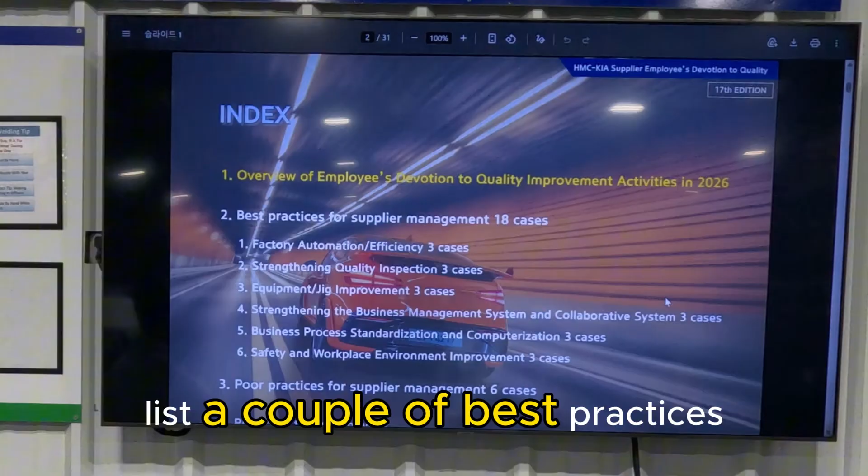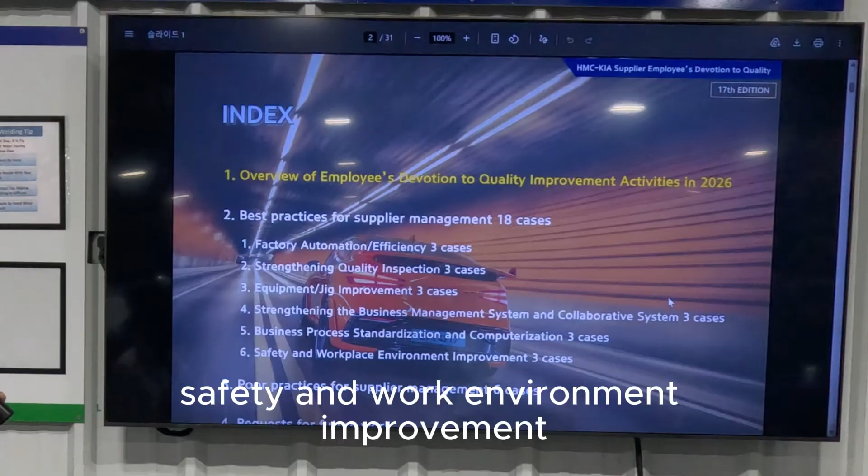This is the index. First is the overview of devotion to quality improvement activities in 2026, and the presentation lists a couple of best practices from different suppliers based on factory automation to improve efficiency, strengthening quality inspection, equipment and jig improvement examples, strengthening of business management system and collaborative system, business process standardization and computerization, safety and work environment improvement, and some examples of poor practices in management in the shop floor, and finally a request for future work.

This is the overview of the employees' devotion to quality improvement activities in 2026. They will review the 2025 and 2026 plan and the 2025 implementation results.

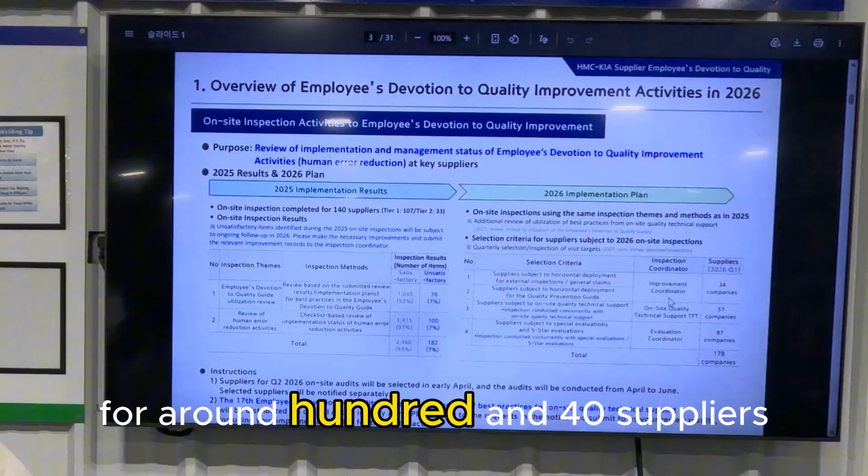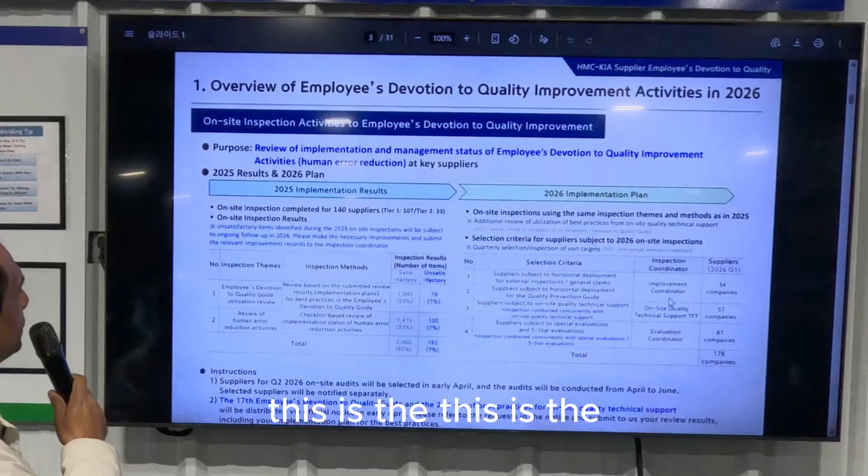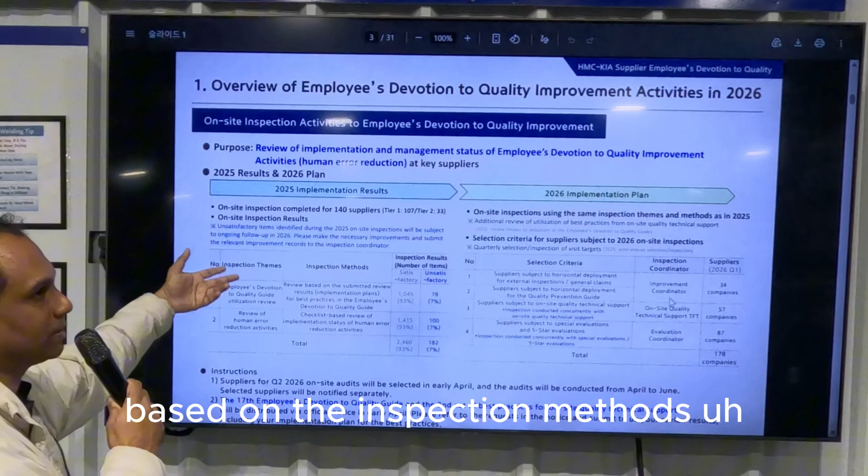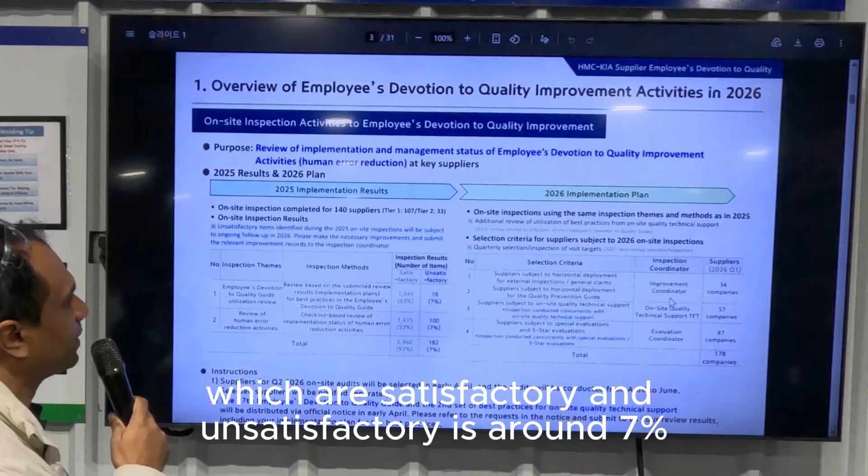The on-site inspection completed for around 140 suppliers, Tier 1, 107, and Tier 2, 33. Based on the inspection results, total inspection results are around 93% satisfactory and 7% unsatisfactory, based on the inspection methods, automation, and everything on the shop floor. Then a review of human error reduction activities, which is around 93% satisfactory overall and 7% unsatisfactory.

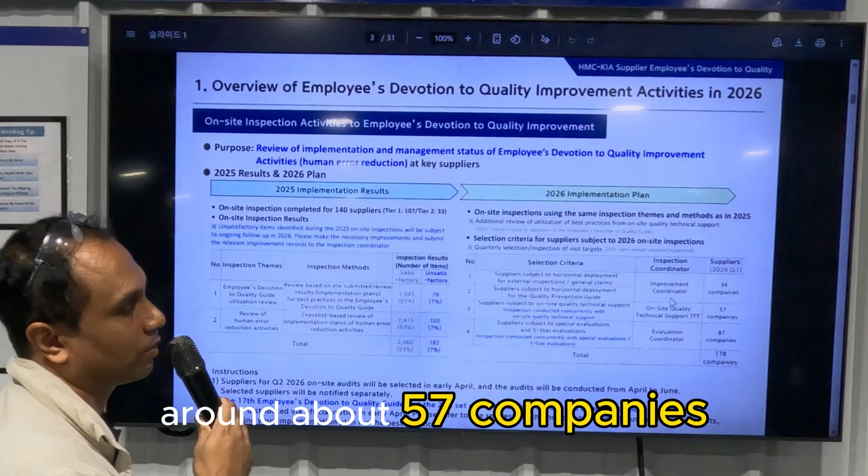In 2026, they're going to do the same thing again, maybe with different quarterly visits. They will select around 34 companies for improvement coordination, on-site quality technical support for around 57 companies, and other evaluation for around 87 companies.

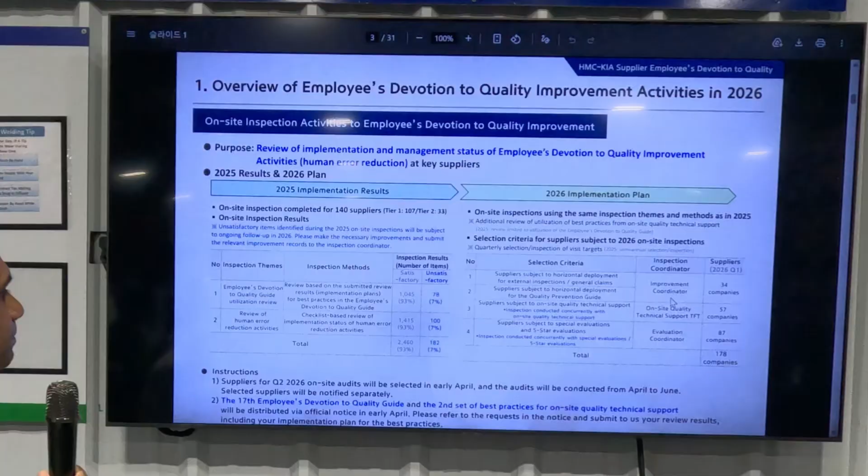They will choose and let us know when they will come to do an audit. It also involves 5-star evaluations too. HMA, for example, will do a 5-star audit this year, most probably in August. They will select in April and then let us know. The audits will be conducted from April to June, or maybe even further.

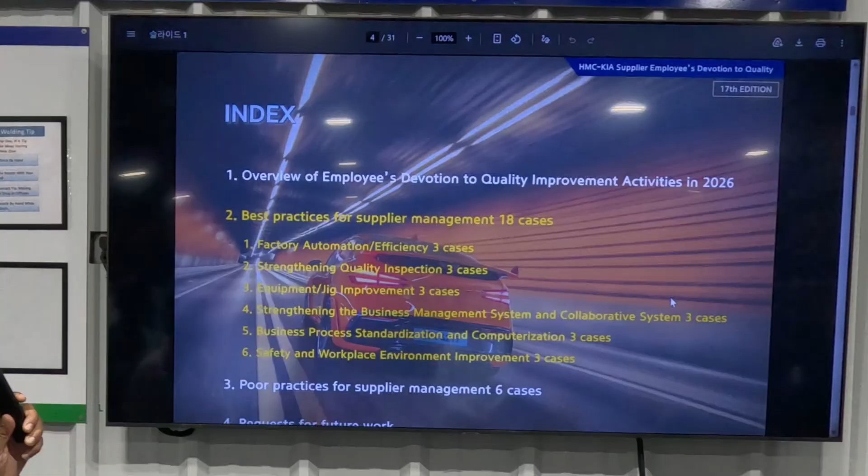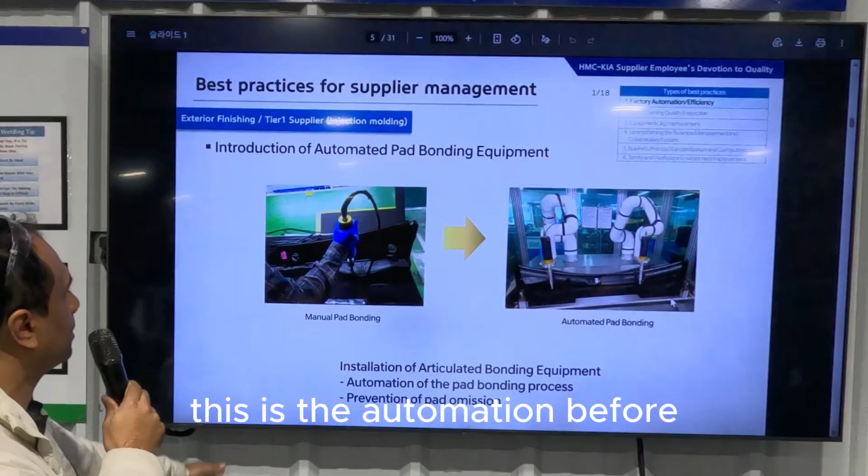These are a couple of examples of best practices for supplier management. For example, this is the automation before, in this case, of pad bonding.

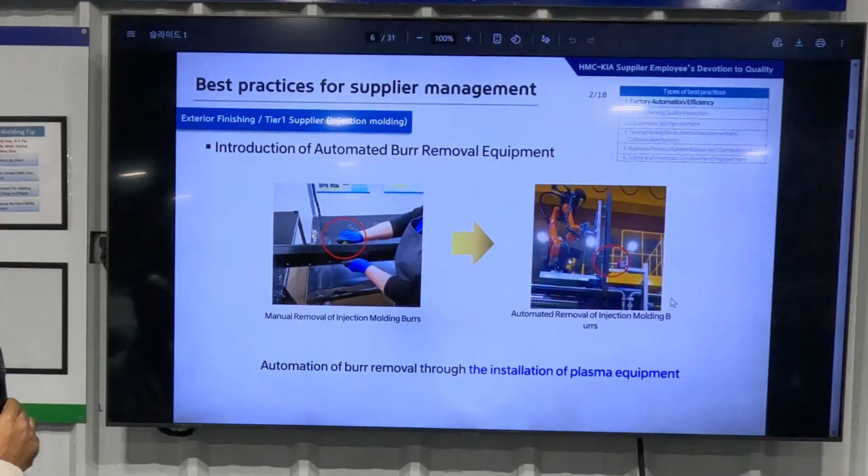This is just manual pad bonding, and the improvement is basically automated pad bonding. Similarly, for the burr removal, manual removal of injection molding burrs, and they have improved to automated removal of burrs.

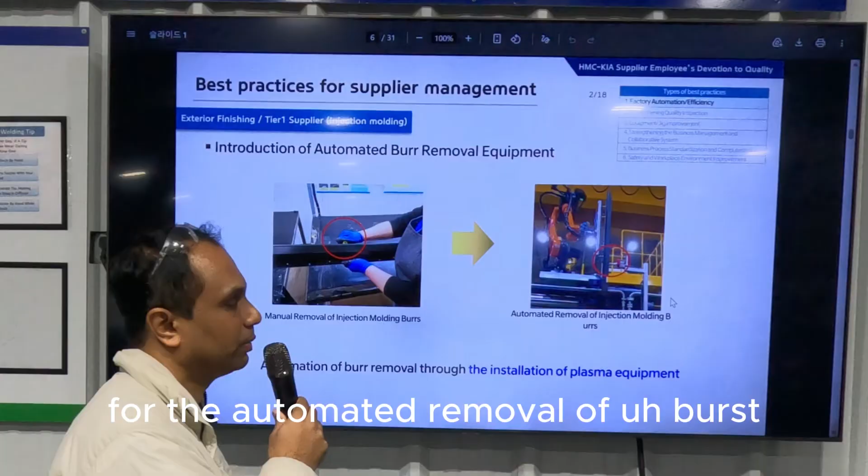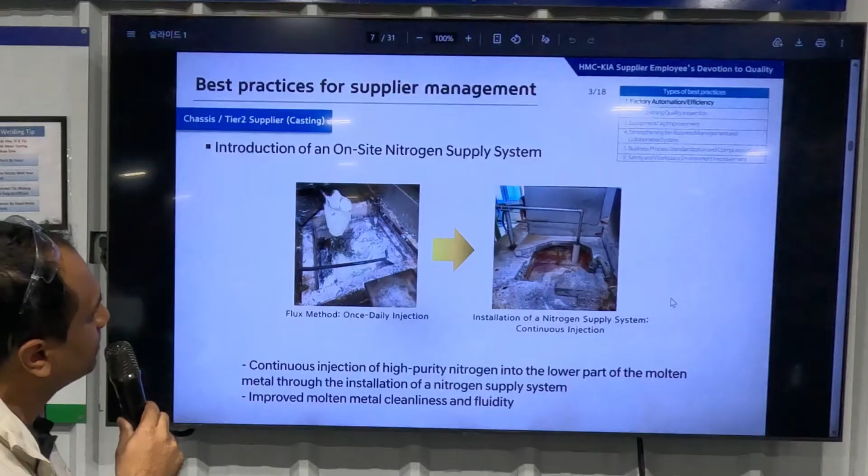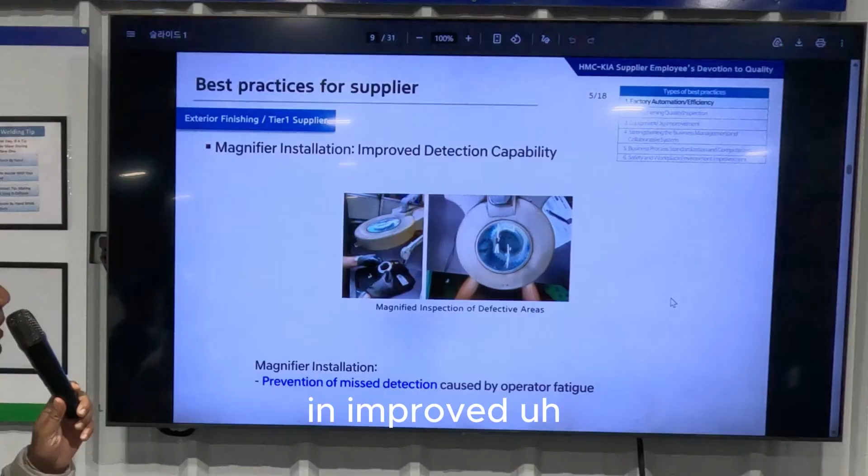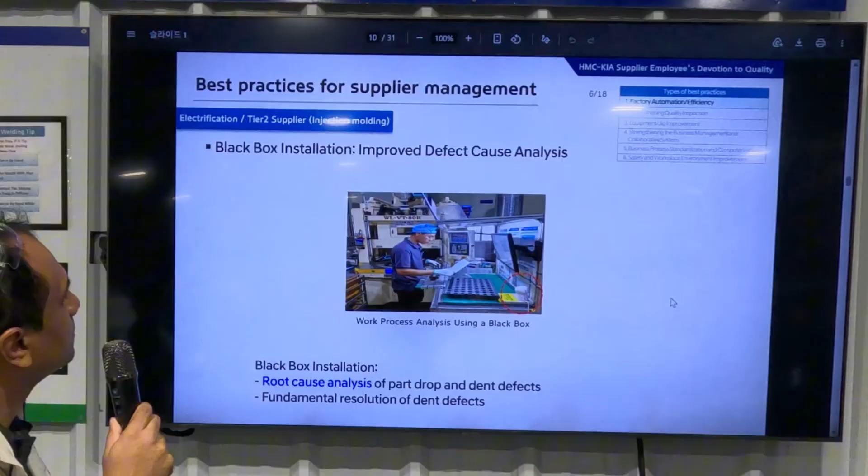This is also improved detection capability for inspection. They use magnifying glasses to find the defects in that part. Again, a different improved inspection analysis, in this case using a black box.

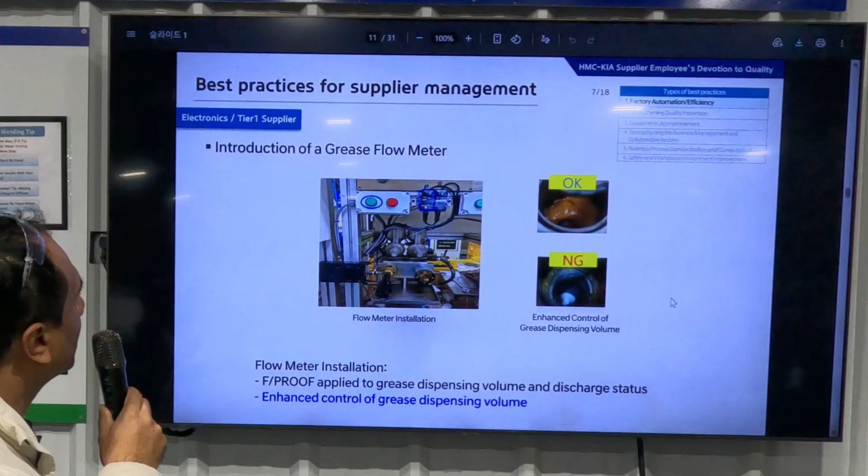Introduction of a grease flow meter to check the grease flow. It checks automatically if it's okay or NG based on the volume of flow.

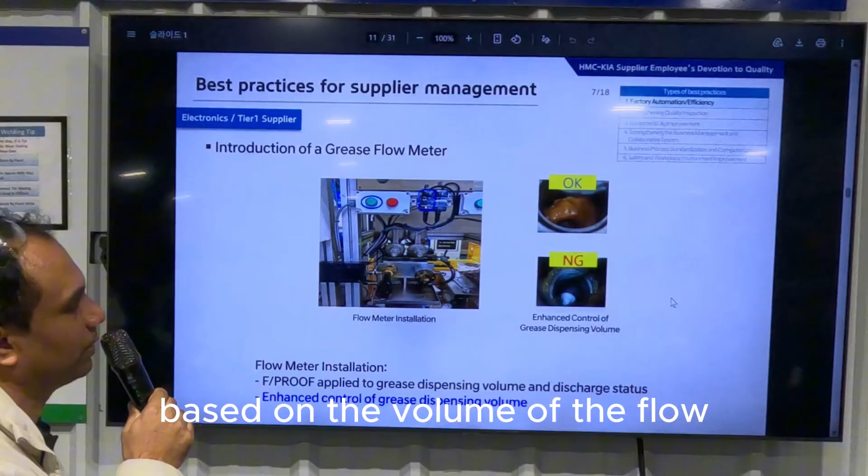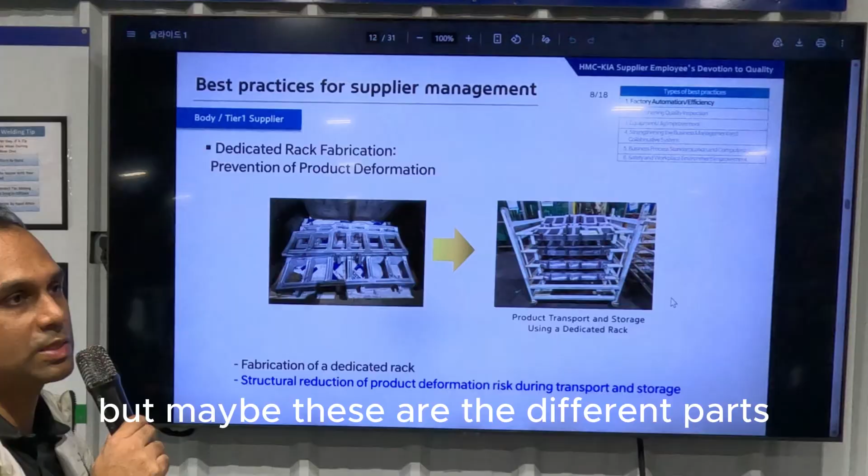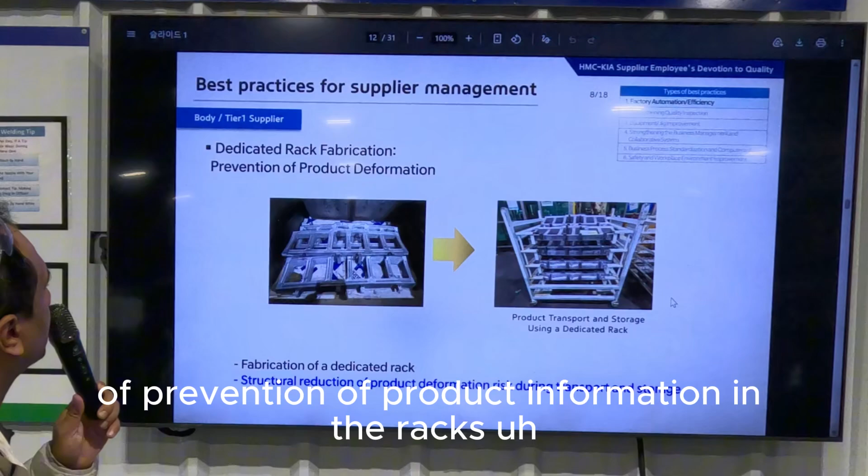We have similar processes, but maybe for different parts, and we can also implement based on the improvement ideas here. We can also improve our process and systems. You could see in this case the prevention of product deformation in the racks, how they improved the racks and storage system.

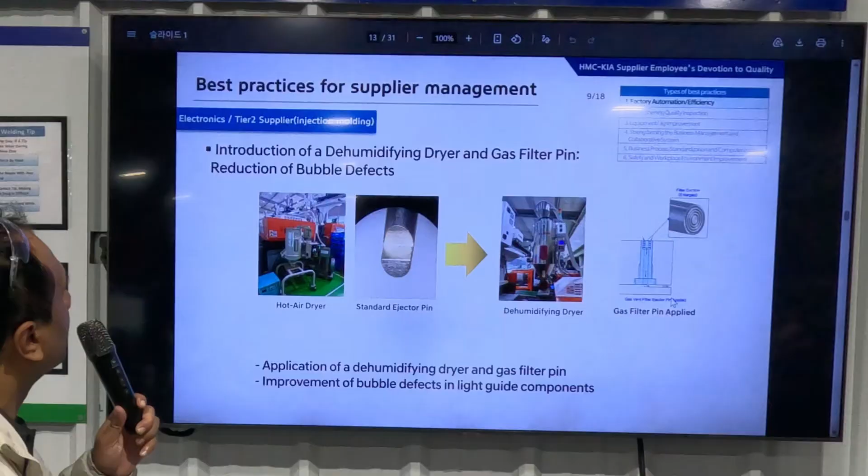Here, just the improvement, reduction of bubble defects in the dehumidifying dryer and gas filter. You can see visually from the pictures.

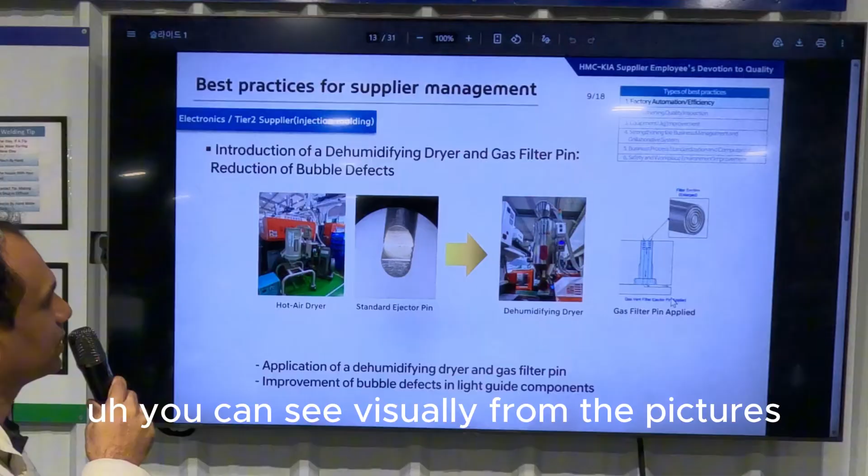This is the establishment of the on-site call system in case of production stop and part quality issues. The supplier established a call system where the monitor shows there's an issue in a line, and it blinks, and management has to go to the line and fix the issue. It's basically an on-site sharing system.

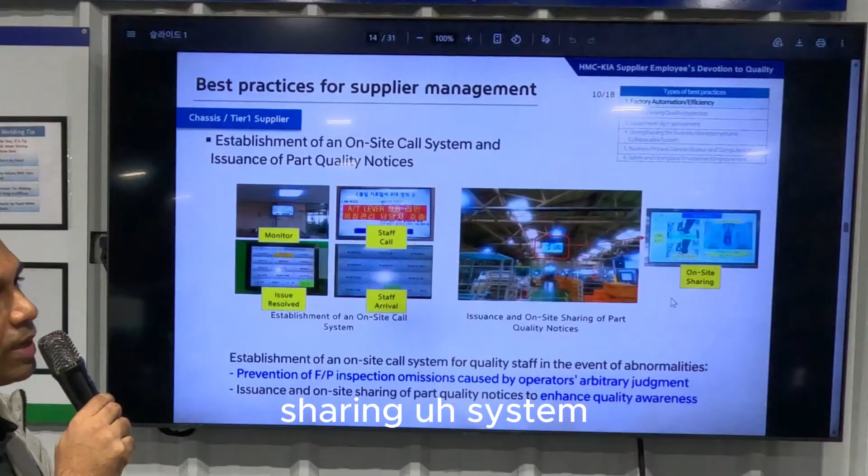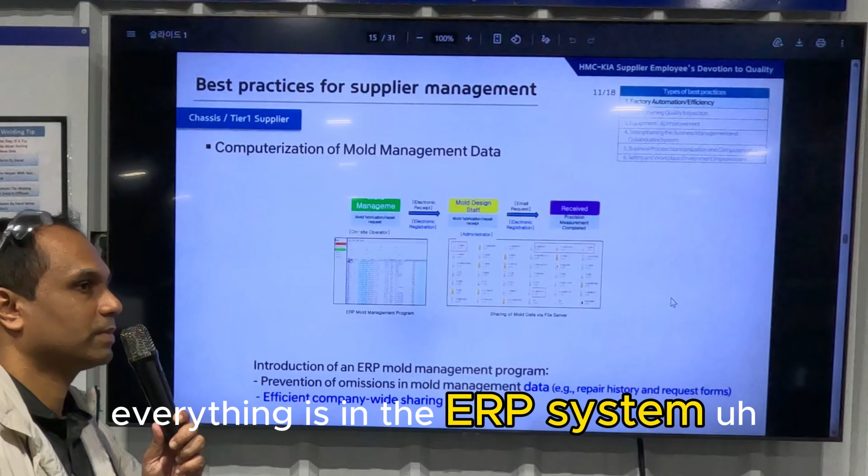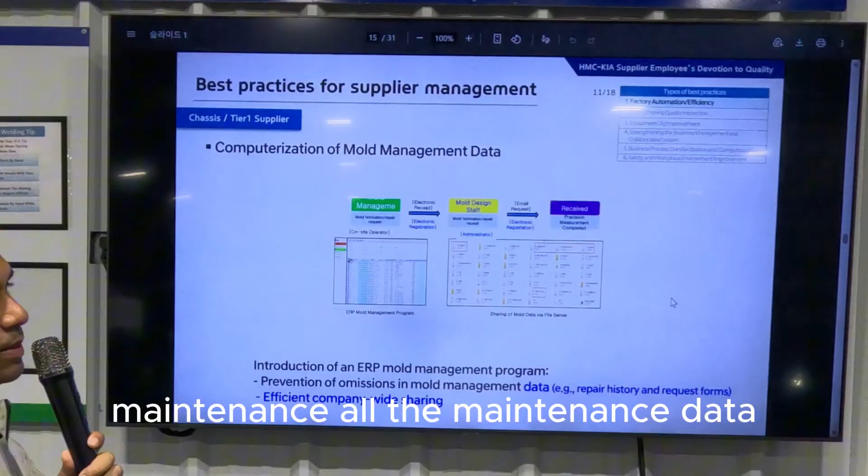This is for maintenance: the computerization of mold management data, how everything is in the ERP system for mold management. In our case, the time management systems are all computerized, and you can see when it's maintained, all the maintenance data, repair history, and other information.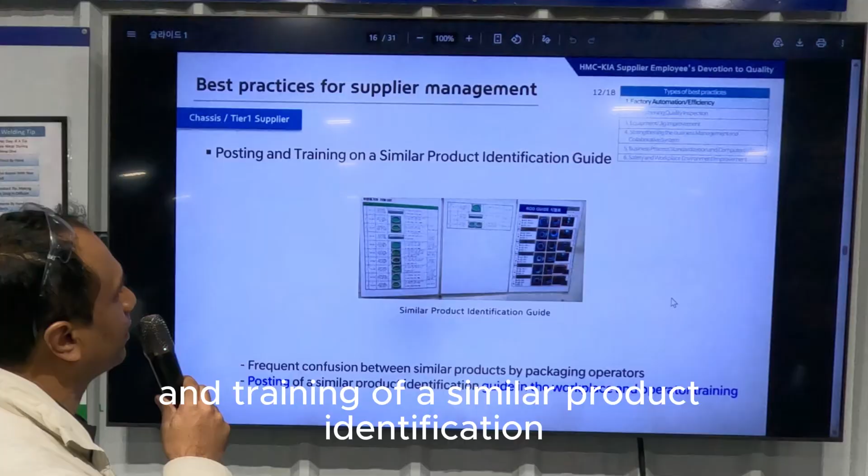This is just the posting and training of similar product identification for operators and inspectors in the workplace.

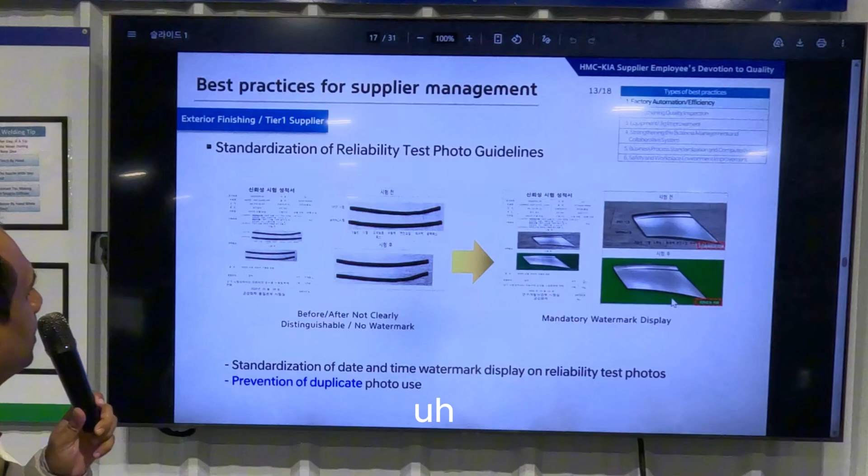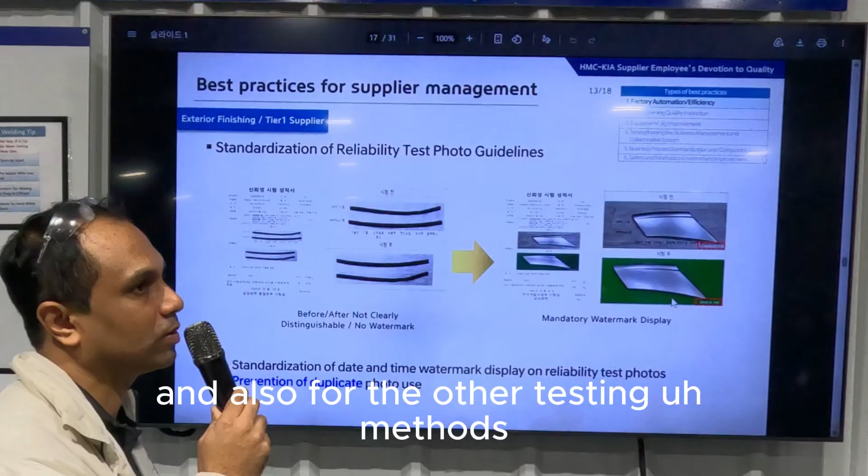This is the standardization of reliability test photos. These are the before and after pictures of the displays and how to inspect, and also for other testing methods.

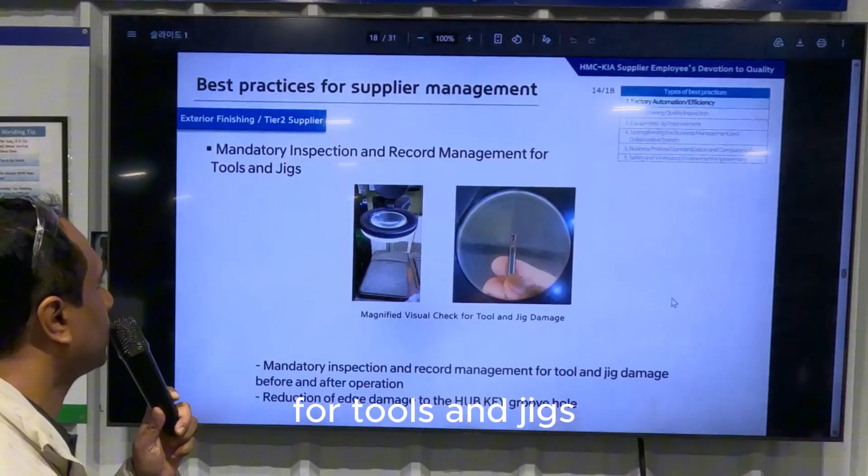This is mandatory inspection and record management for tools and jigs. This is the visual check system improvement.

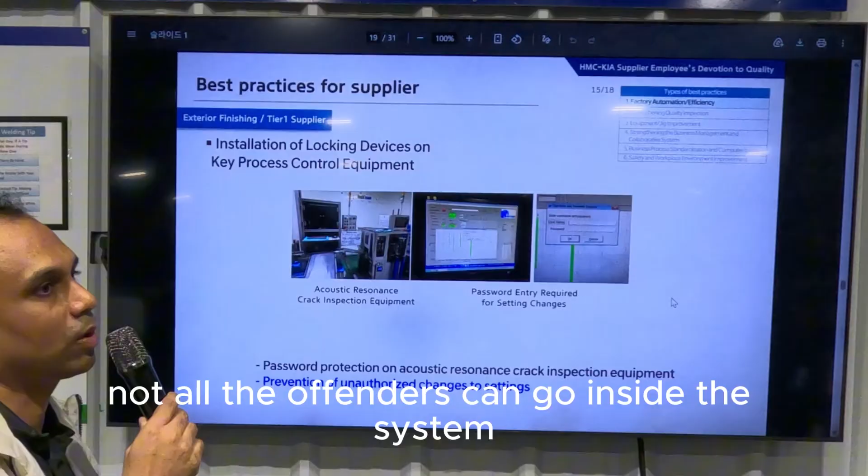This is installation of locking devices for key process control equipment. In case of maintenance and production, they have a specific username and password so that not all operators can go inside the system and change the parameters. Only approved personnel will enter the system, and we do have it.

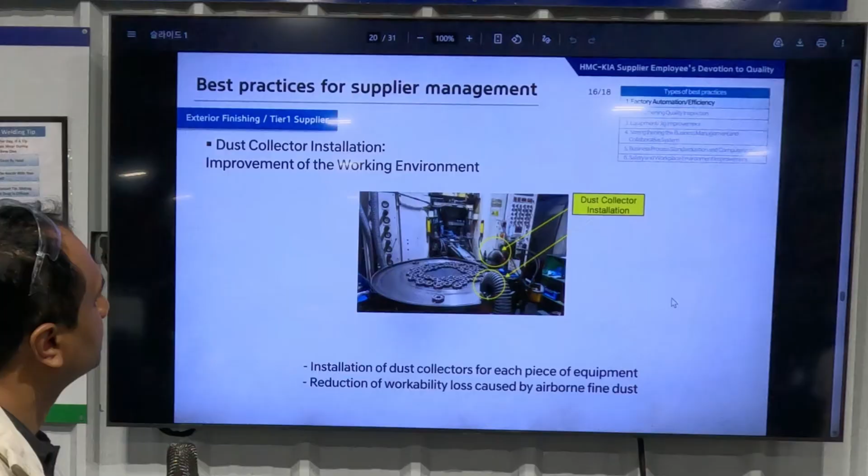This is the dust collector installation. Just the visual check, you can see it, visual check.

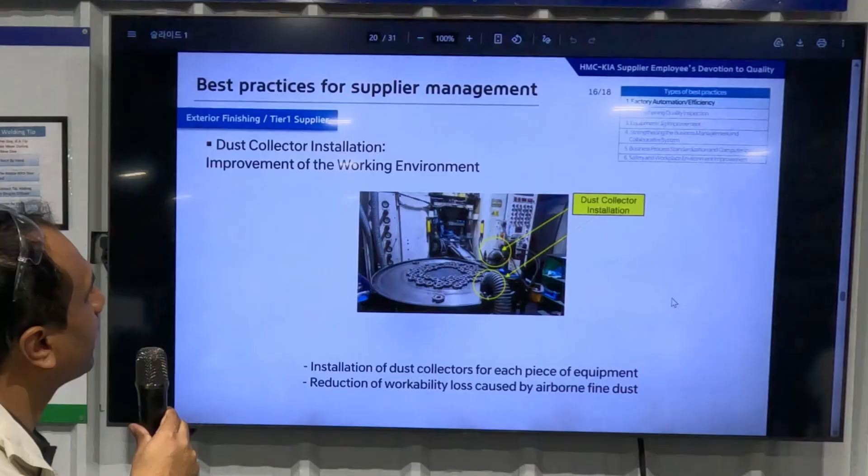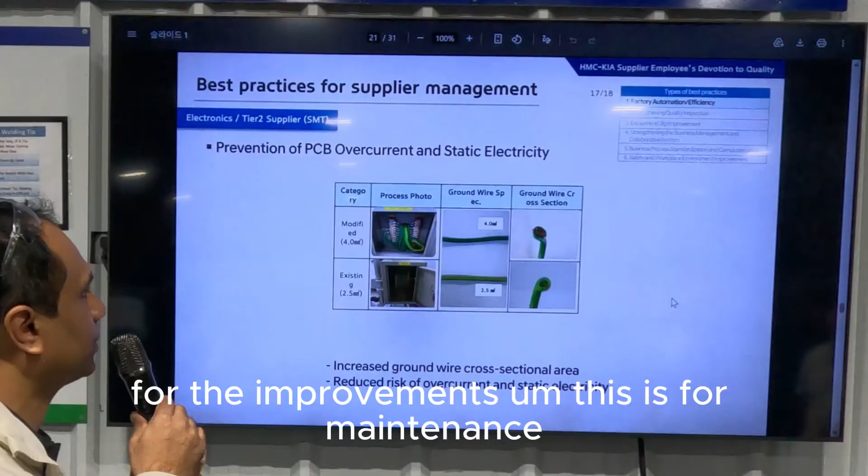This is kind of the electronic system. Increased ground wires for the cross-sectional area for the improvements. This is for maintenance.

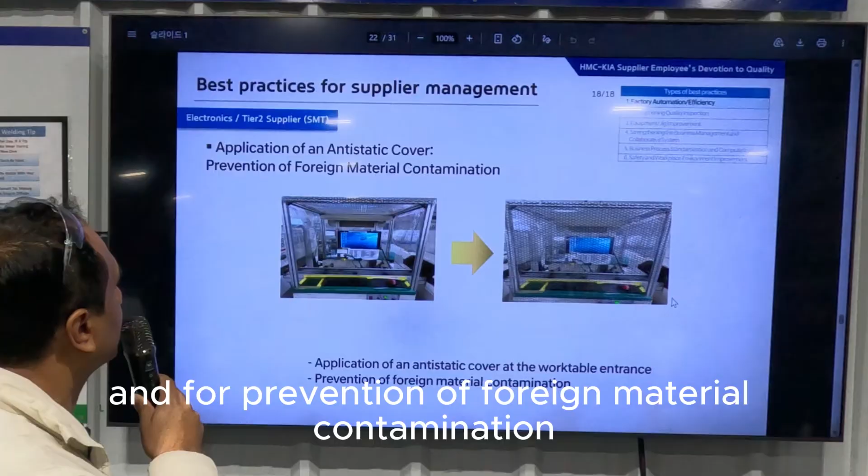Application of anti-static cover and for prevention of foreign material contamination, kind of put a barrier.

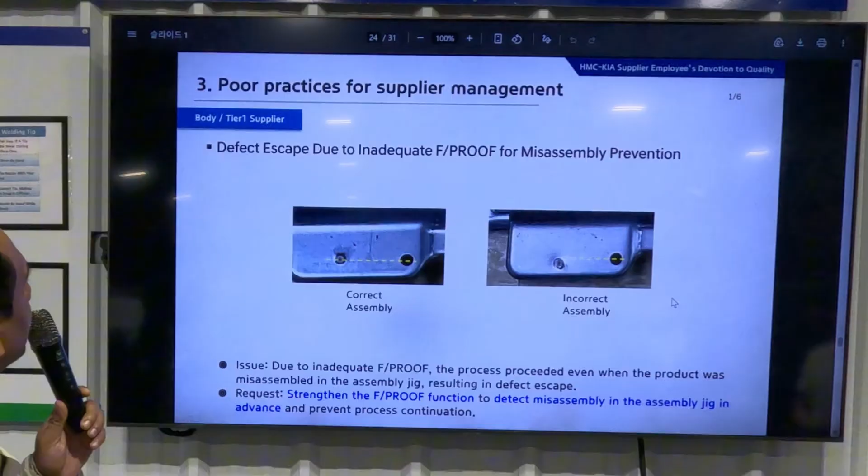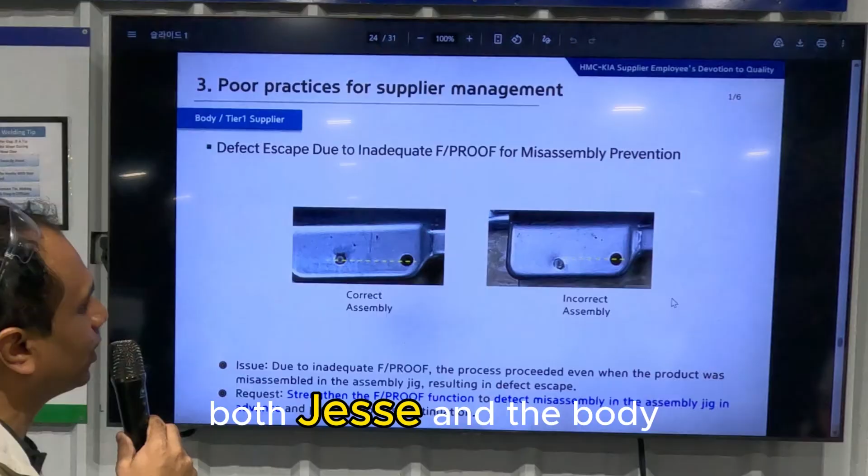Next is poor practices and improvement. This is the inadequate fool-proof assembly. We have many such issues and countermeasures in both chassis and body. Correct assembly, incorrect assembly, and how they improve the fool-proof detection system.

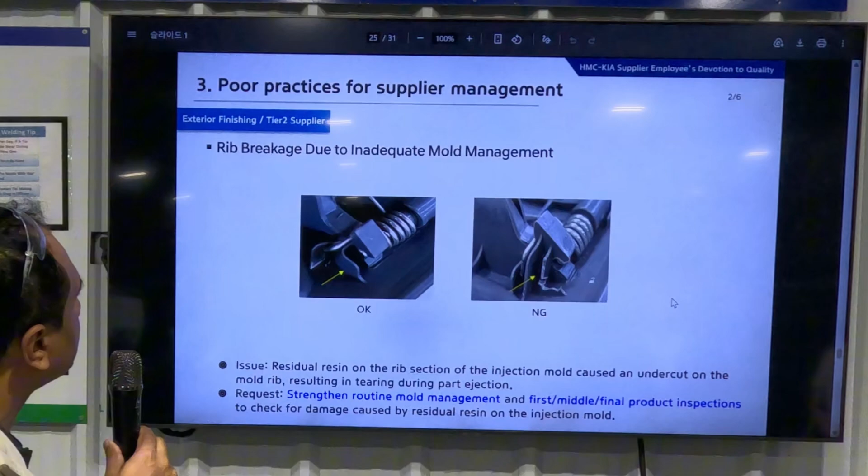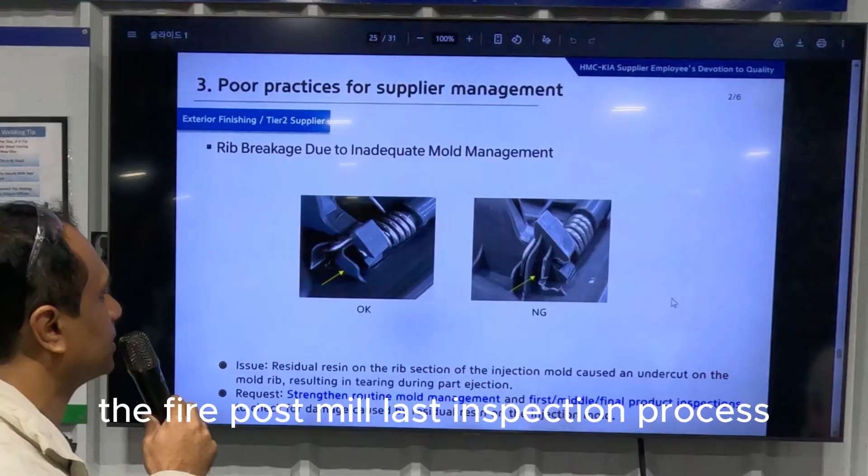Similarly, in this case, there's a breakage due to inadequate mold management system, so they improved the first-middle-last inspection process. We already do the first-middle-last inspection in jig fixture checks.

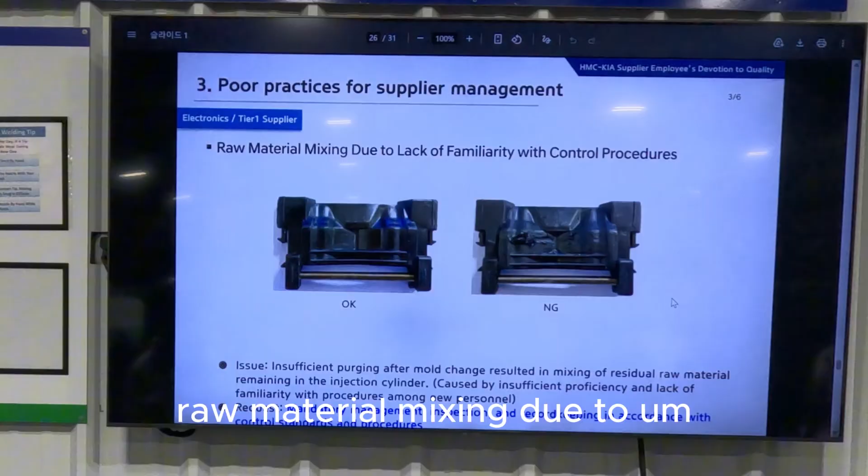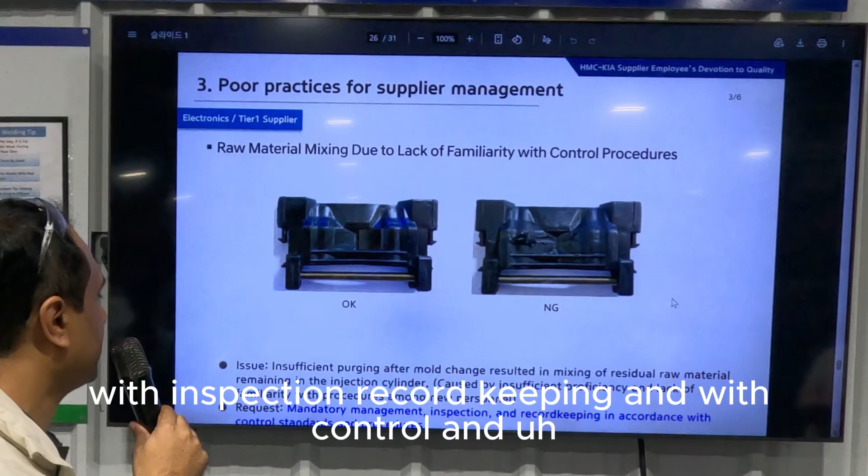Raw material mixing due to lack of familiarity with control procedures. Again, the OK and NG picture, and how to improve with inspection, record keeping, and control procedures.

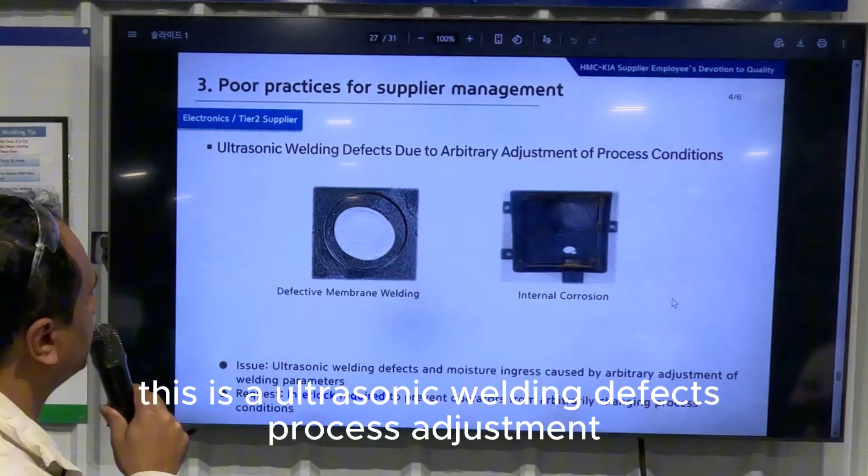This is ultrasonic welding defects process adjustment. The picture shows the defective membrane welding, which also causes internal corrosion. Basically it didn't have the interlock system which prevented the flow of defect.

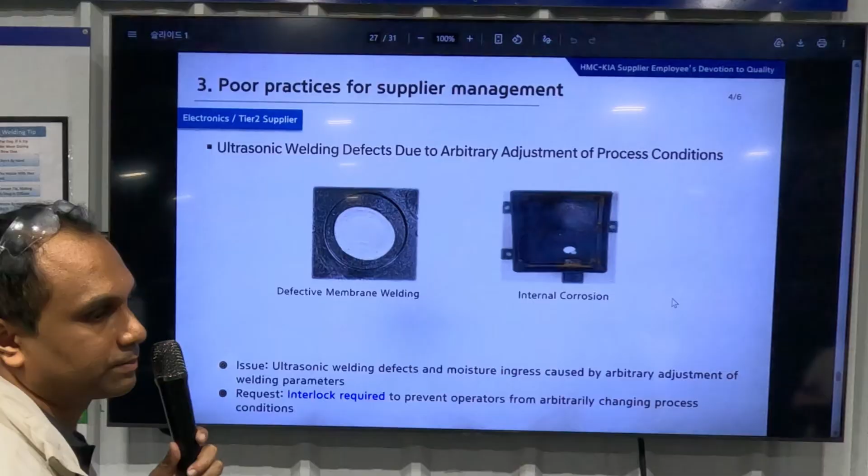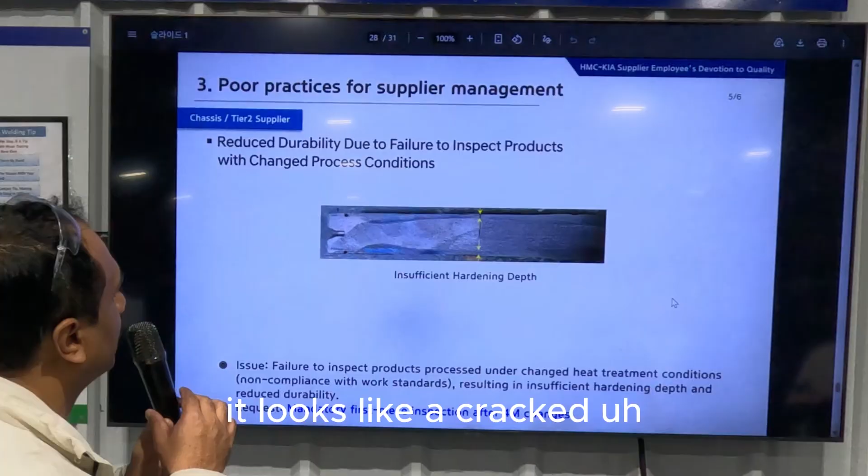This is the reduced durability due to failure. It looks cracked, with insufficient hardening depth. It just says the mandatory first-piece inspection after 4M changes.

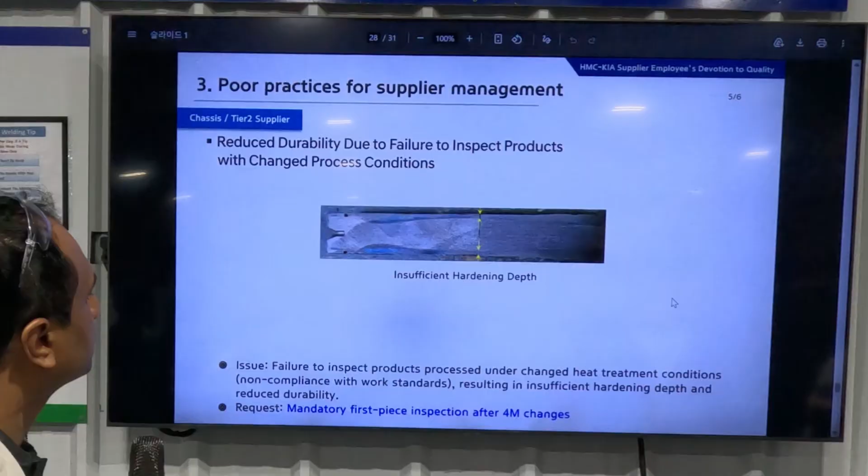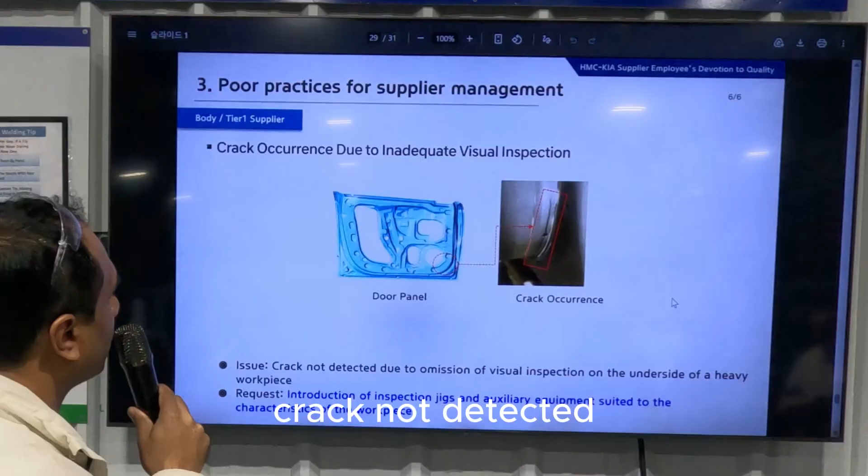This looks like a body door panel with crack occurrence, crack not detected due to omission of visual inspection. The improvement is introduction of inspection jigs and auxiliary equipment suited to check the workpiece.

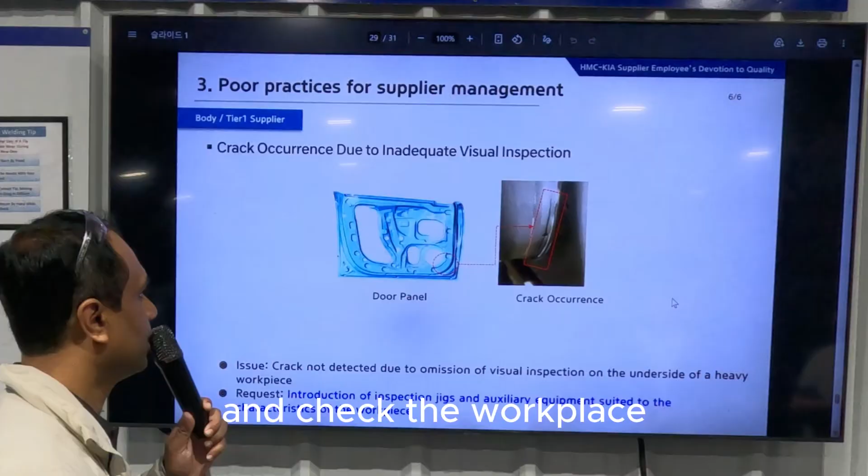Next is the request for future work. We have to send our improvement activities which we have done over the year to the customer, and then they will come and do an audit kind of thing.

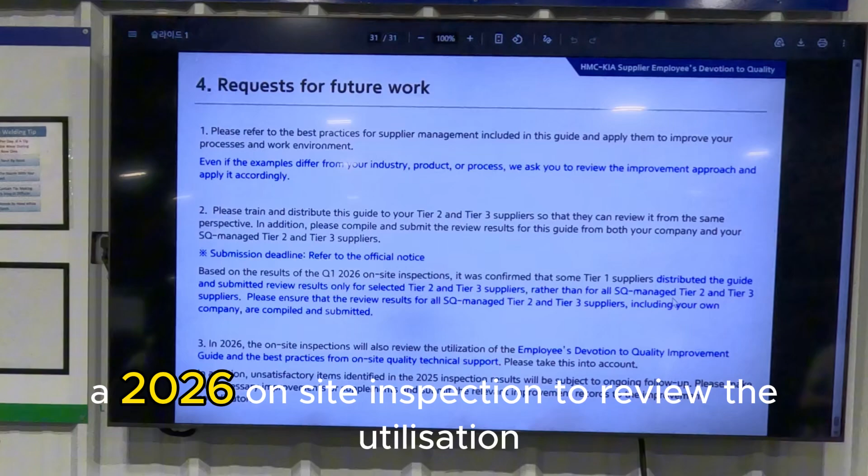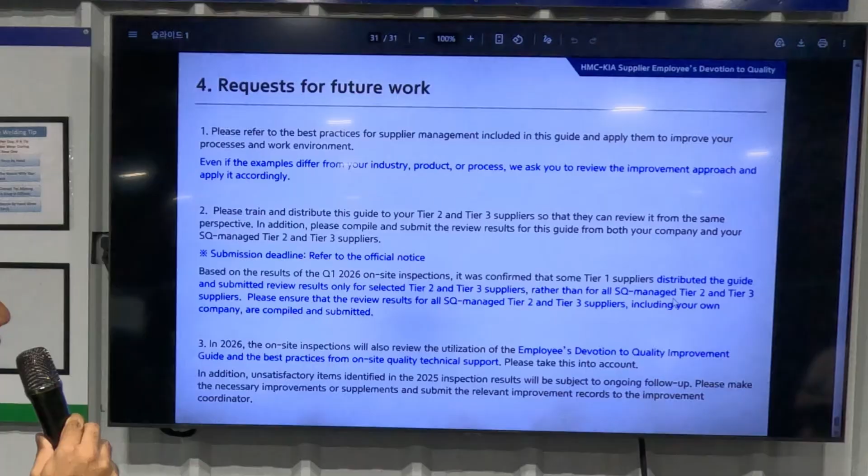They will do a detailed 2026 on-site inspection to review the utilization of employees' devotion to quality improvement and our best practices. So just reviewing, and I will send an email to everyone so you can read it, and all departments can again have a small training for all your employees.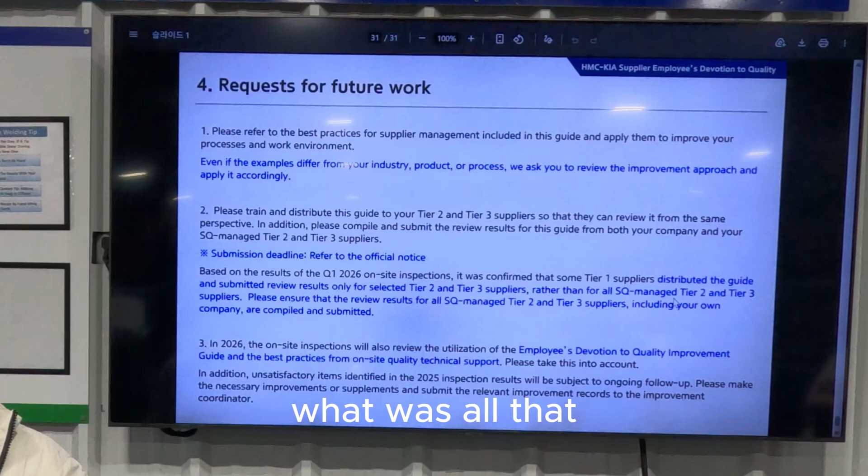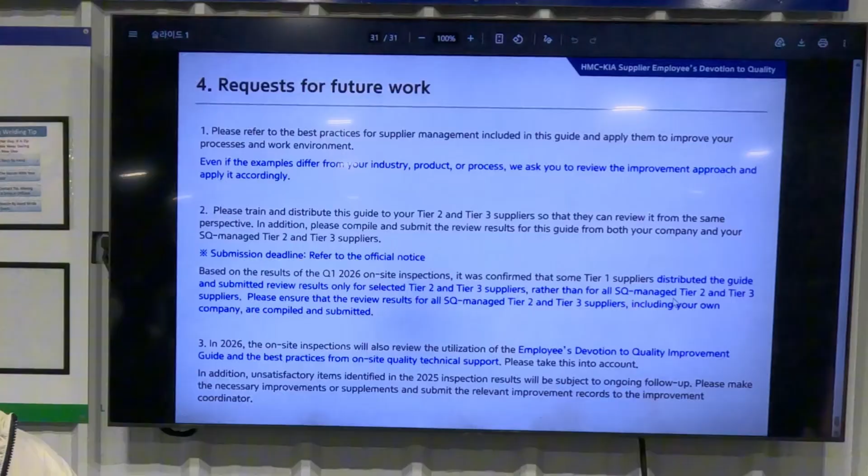What was all that? We've been studying this for a while now. Every bit of it was continuous improvement, right? Because you just have to think about the next step. What is the next step? Continuous improvement, right? You've got to think of how to make it better, and sometimes we get tied up and we don't quite make it to the next step because maybe it's so hard.

But we need to think about it and say, hey, I need some help. You know what, Tanya, I need some help. Give me some help, let me hear your idea. Because sometimes I think we overthink stuff, right? Because it's so difficult. So make sure when you're on the line, if you need some help, raise your hand.

We ain't scared to try to help you. We may not get it solved, but you know what, we can try, okay? So always remember continuous improvement.